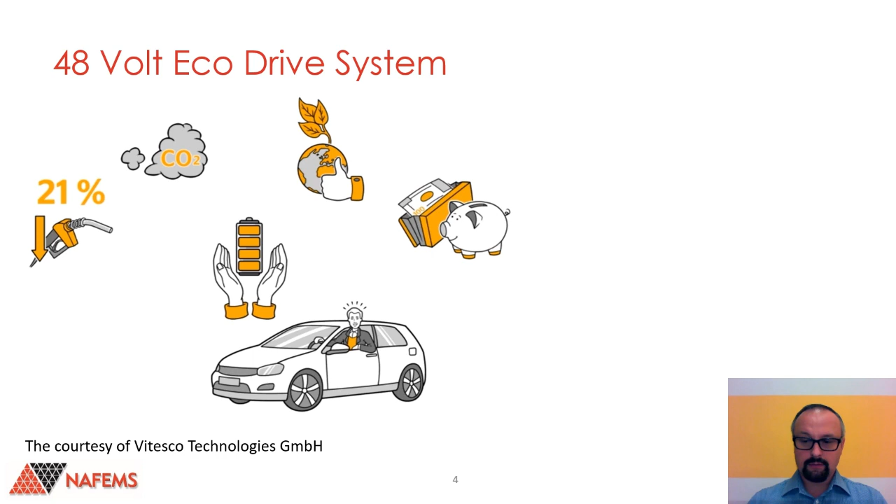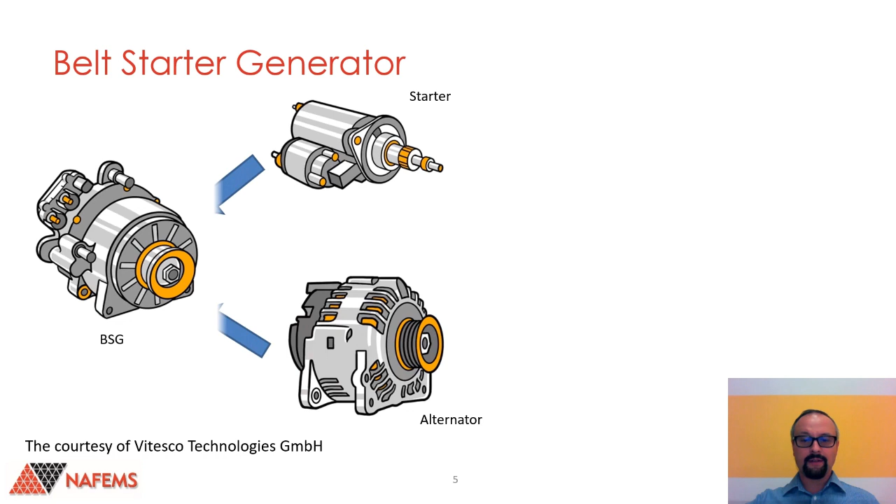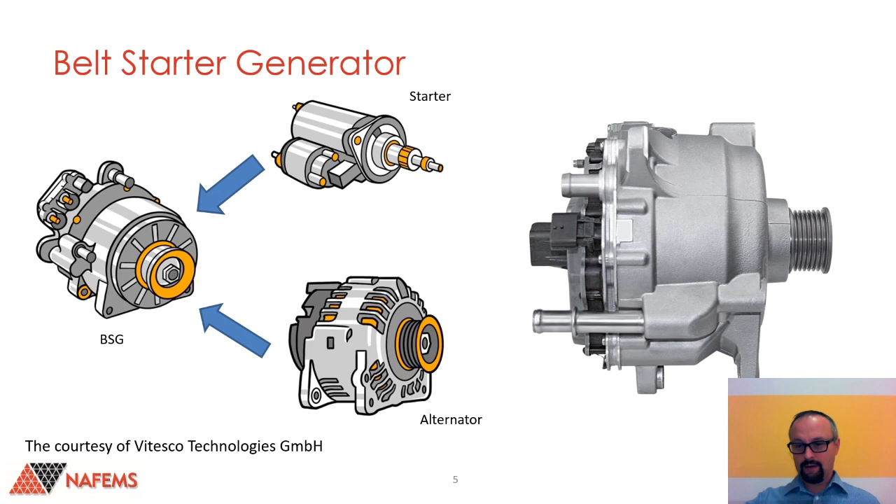And the system was designed by Vitesco Technologies, formerly known as Continental, and it was already used in cars like this Audi A8. The heart of this eco-drive system is the so-called belt starter generator. It is a device which replaces two other devices formerly used in traditional combustion cars, namely the starter and the alternator. And if you look under the hood of this Audi A8, you'll probably see such a device. So an assembly of parts made almost only from metal, from aluminum in this case. You will see the belt starter generator mounted close to the engine, on the main transmission belt of the engine. And because of that, the whole assembly is mainly loaded by the forces generated by this belt, so by an oscillating force.

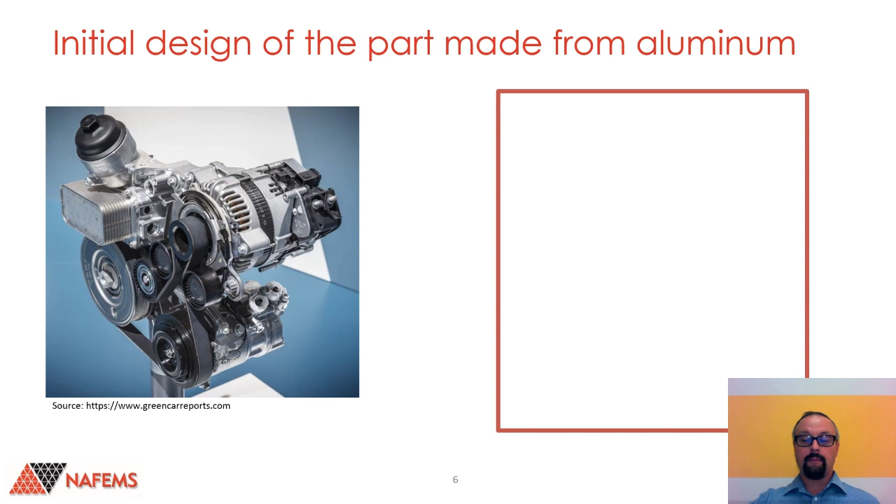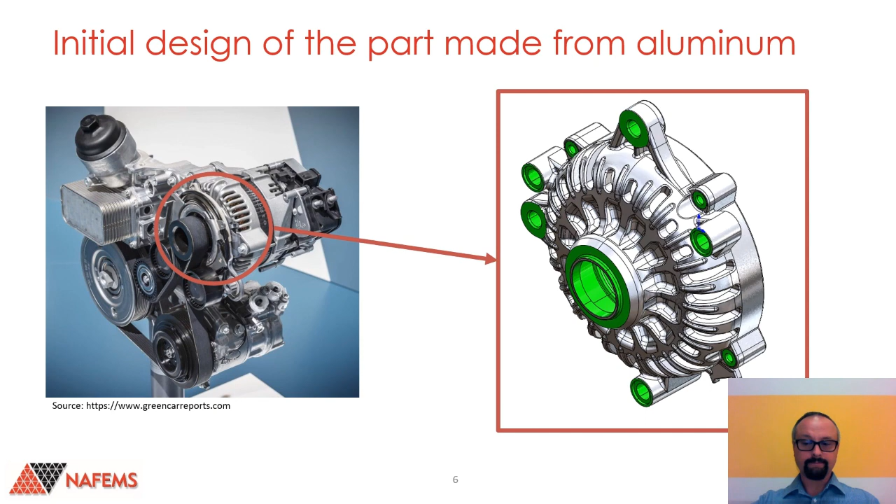And as you can see, almost all the main parts of the assembly are made from metal, from aluminum. But our job today is, of course, to replace the metal parts with plastic ones. And during this presentation, I'm going to describe this metal to plastic replacement process for this particular part, the front half of the housing here. Okay, so let's do it. Let's take the metallic material from the part, and instead use the polymeric one.

But I think almost everybody knows that things aren't so easy here, and it is impossible just to take the old design, the old geometry, and use the new material, especially a polymeric material, and just produce new parts. Because, as you can see here, the wall thicknesses in this particular part vary from 3.5 millimeters to almost 12 millimeters, which is, mildly speaking, unsuitable for injection molding, and it will lead to huge warpage and make the part not acceptable by anybody.

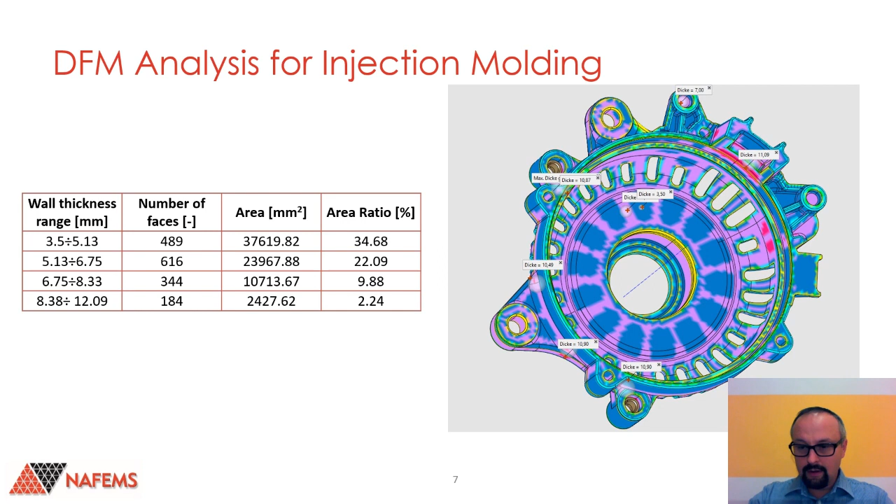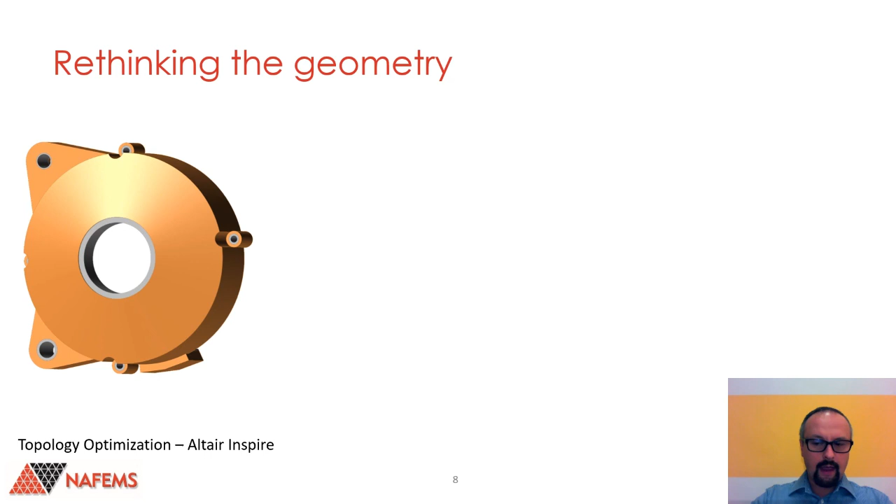So if we cannot use the old geometry, the old design, we need to make a new one. And to do so, we start with a shell model with a constant wall thickness suitable for injection molding, and we perform a so-called topology optimization to look for the new geometry for the structure, like these ribs here, which were suggested by the optimization, and they are obviously needed to fulfill the structural demands for the part.

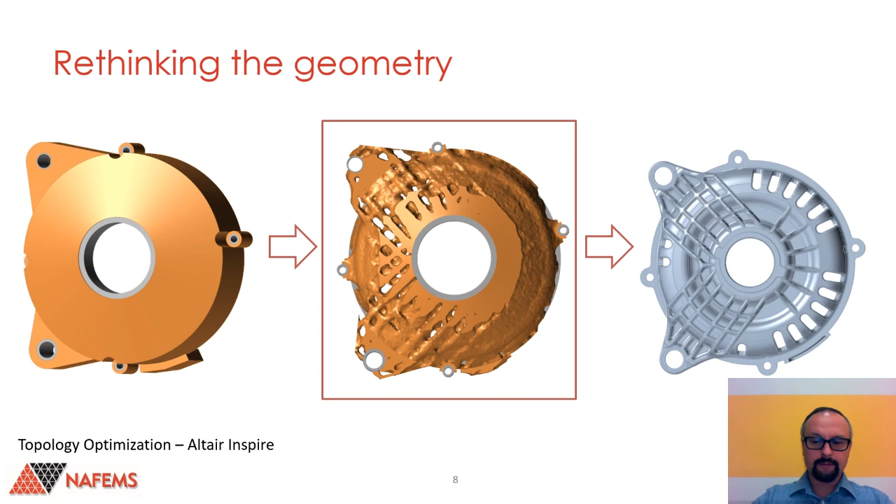Even though we design our geometry according to these DFM rules, so with a constant wall thickness, we still need to double check it with this injection molding simulation, because as you can see here, it appears that our well-designed geometry has a post-molding deformation warpage of almost 2.6 millimeters in this specific area here.

And of course, with software, with Moldex3D in this case, we can not only predict the displacement, the value of the warpage, but we can also try to avoid it by changing our geometry. And as you can see here, that's exactly what we did. By changing the geometry of the ribs in some areas near to the walls, we reduced the warpage by almost 50%, from 2.6 millimeters to 1.5, and kept it in the acceptable range.

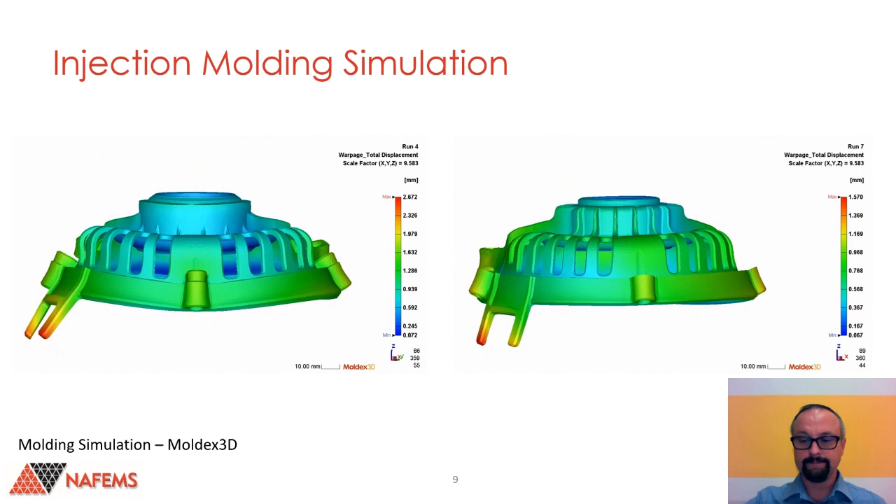And now, if we have our geometry, which is fully prepared for the manufacturing process, for the injection molding, we can move to the structural analysis, to the frequency response and numerical simulation of our part, because the main force, the main load for our design is the force generated by the transmission belt of the combustion engine.

And as you can see here on these pictures, the values of stress and strain aren't very worrying. They aren't above the limits which were set up by the producer of the material, because here we are using PA66 with 30% fiber reinforcement, and such values are still okay, still acceptable. So, are we done here? Are we ready to produce the part? Of course not. And why not?

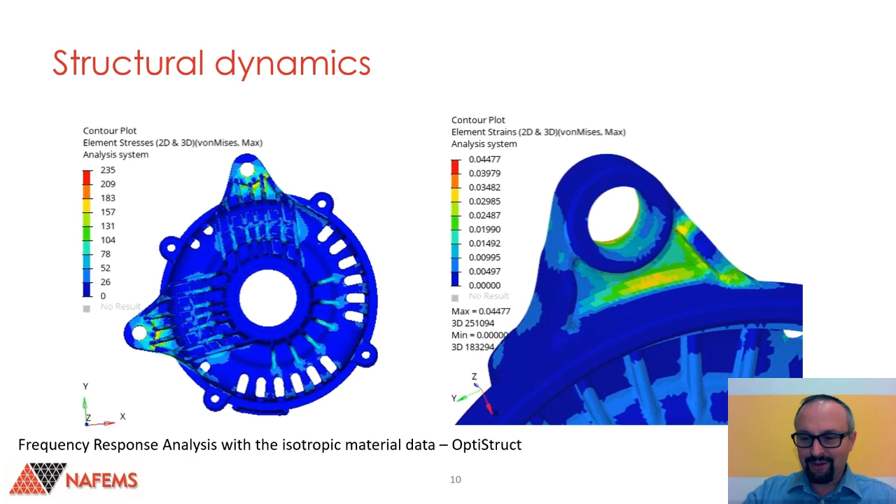The key to the answer is this one word here, namely isotropic. We cannot assume that our polymeric material or composite after injection molding is going to have fully isotropic properties. Such an assumption at this stage, to put it mildly, isn't a good idea. We always need to take into account the orientation of the fibers in our part after the injection molding process. But which orientation is the right one, and which one should we really consider during our structural analysis?

To answer the question, it is always good to use some kind of optimization tool like DOE, which is embedded in Moldex3D software, in which we can specify our parameters. In this case, they are different models with different gate types for our geometry, different filling times, and mold temperatures. In my opinion, these three are the parameters which have the largest impact on the fiber orientation in the molding. And of course, we need to also define a quality factor.

In this case, we need to use some kind of substitute for our fiber orientation, because right now it's impossible to directly define fiber orientation as a quality factor for the DOE analysis. So we used shear rate in this case, which in my opinion is directly coupled with the fiber orientation, and it can be used in such a manner.

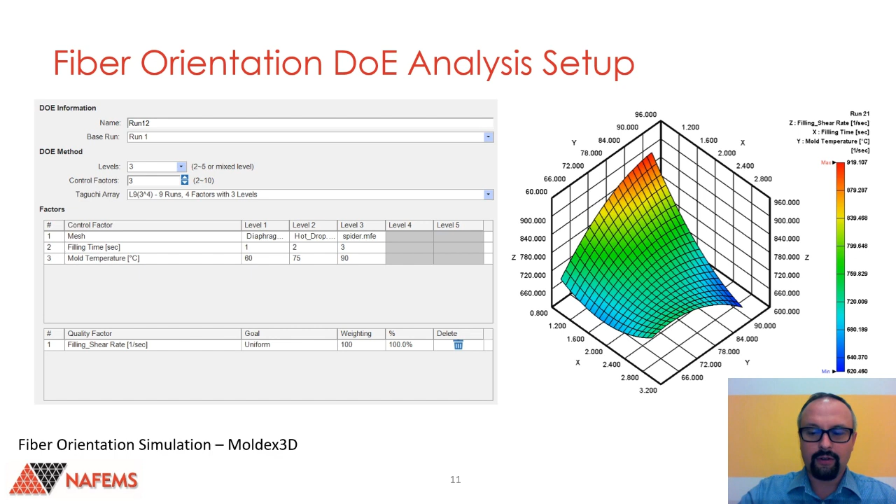But of course, we do not need to analyze it manually or by ourselves only. The program gives us the whole results and finds for us the optimal setting, which in this case looks like that, the model of the gate. So we need to use this type of gate, a so-called spider gate, to have the best possible fiber orientation, and the values of filling time and mold temperature are as given here.

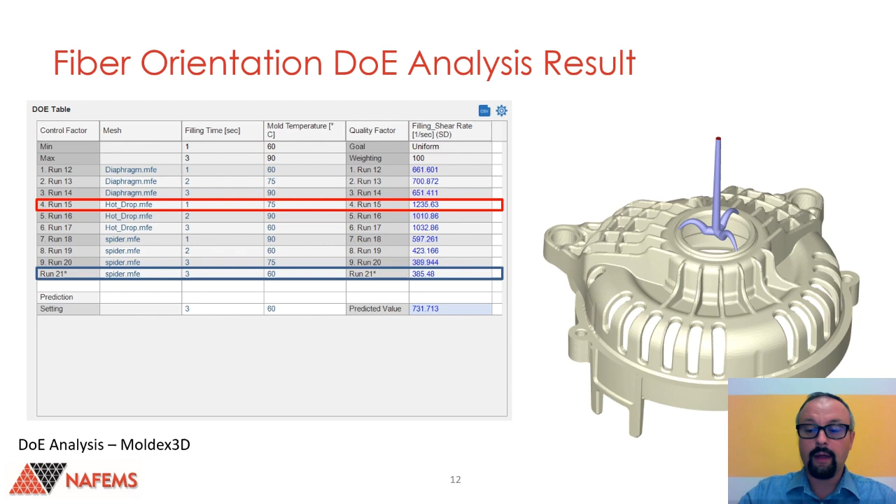And to double check the results of this DOE optimization, it's also good to compare this best result, this optimum, with the worst case, which for this specific case is this one here. So with a filling time of 1 second, mold temperature of 75 degrees, and a direct hot runner gate, hot drop on the part. And as we can see here, there is a clear difference between the optimal and the worst setting. We can see it here in this area.

These two are the results of the E-modulus after the molding, the values of the mean modulus in our part. And as we can see, we have a more uniform distribution of the modulus value for our optimal setting. That's the reason it is optimal.

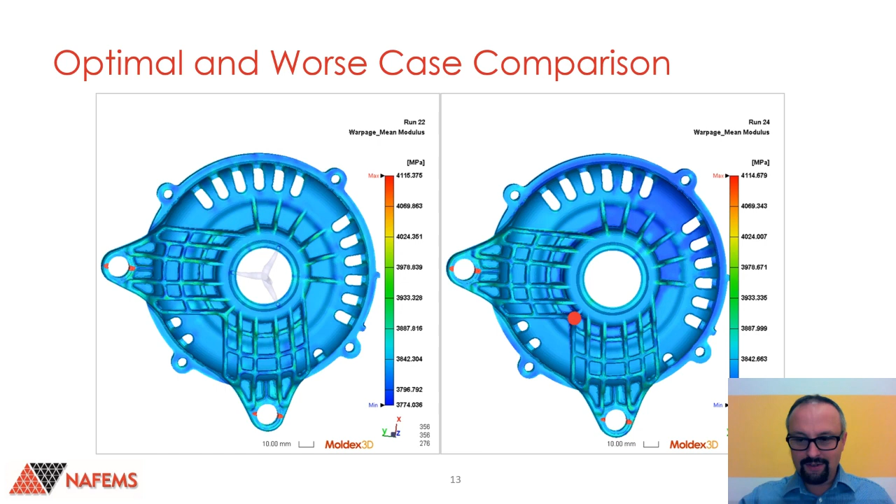So at this point, we know that we need to perform our frequency response analysis, and we have already found the best fiber orientation for our part, for the geometry we have designed. But there is still a gap to be bridged. Namely, we need to transfer the results of our injection molding simulation to the input of our structural analysis.

But right now we don't need to find the way how to do it. There is an already designed, made, and invented solution for that, namely Digimat, the software which helps us to bridge, to combine the two worlds of manufacturing and structural simulations.

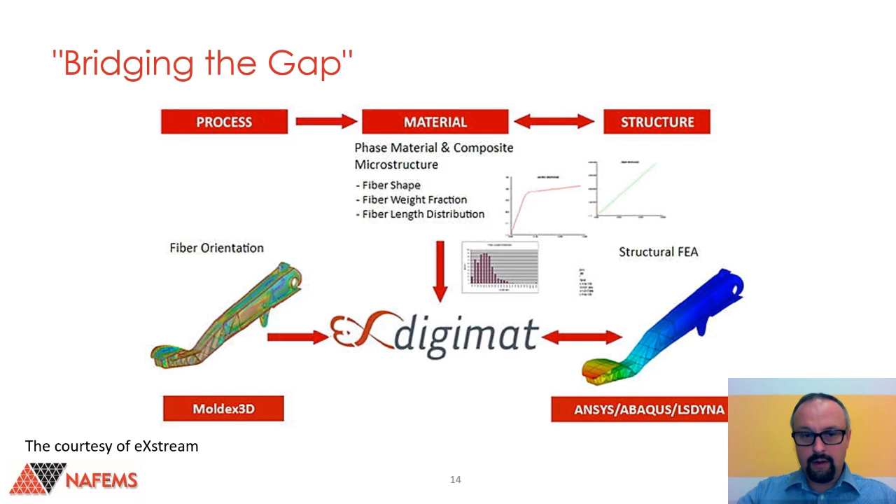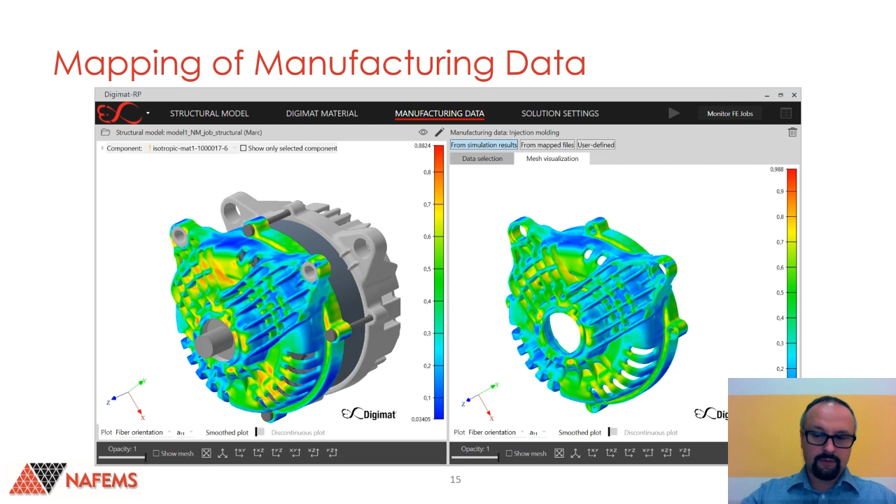So that's the first thing, very important, that the program allows us to map the fiber orientation, weld lines, and other properties from one simulation to the other one. But it also provides us with the material model, which is able to use these properties in the structural analysis, which is probably even more important than only the properties which are being transferred from injection molding to structural simulation.

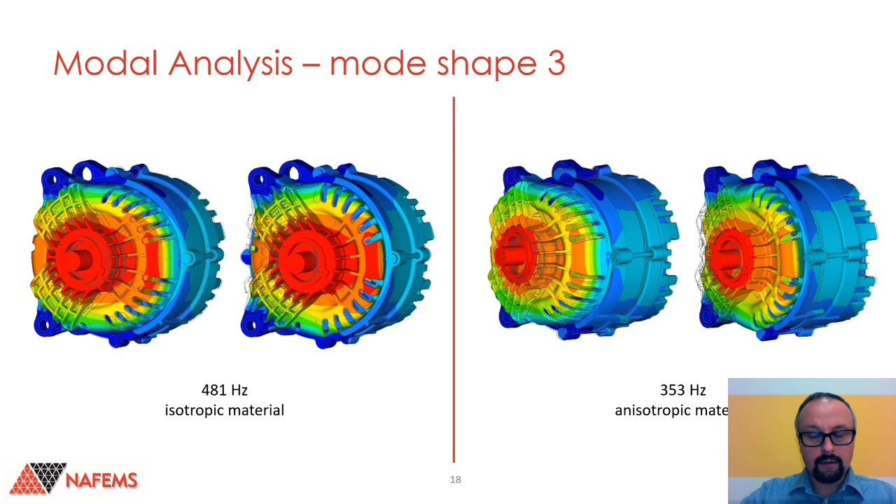So the displacement, the direction of the displacement is the same, and the amplitude. So the situation is pretty much similar for the second mode, for the third mode, and as we can already predict also for the fourth mode. But the natural frequencies of all these modes are not the same.

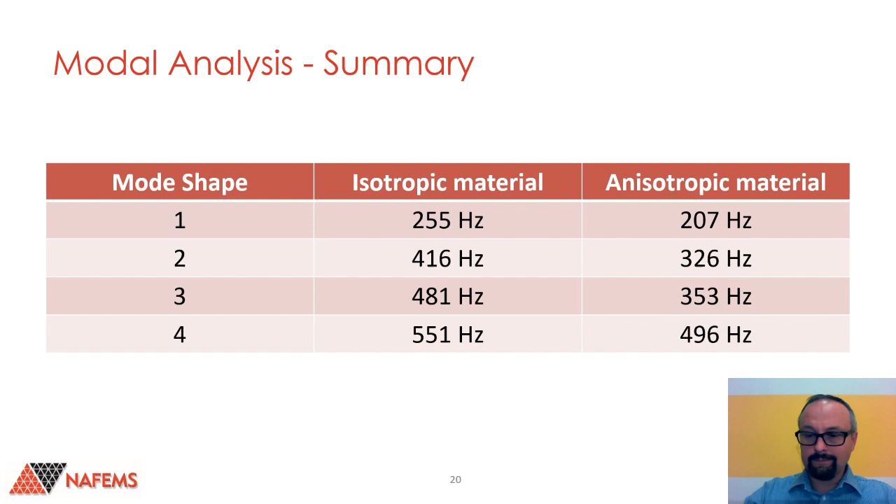I would really like to show you the one-to-one comparison between the experimental result and the result of the structural analysis. But the experiment hasn't been done yet, so at some point we just need to believe that our results, our simulations are correct. And looking at these cases here, we can assume that they really are.

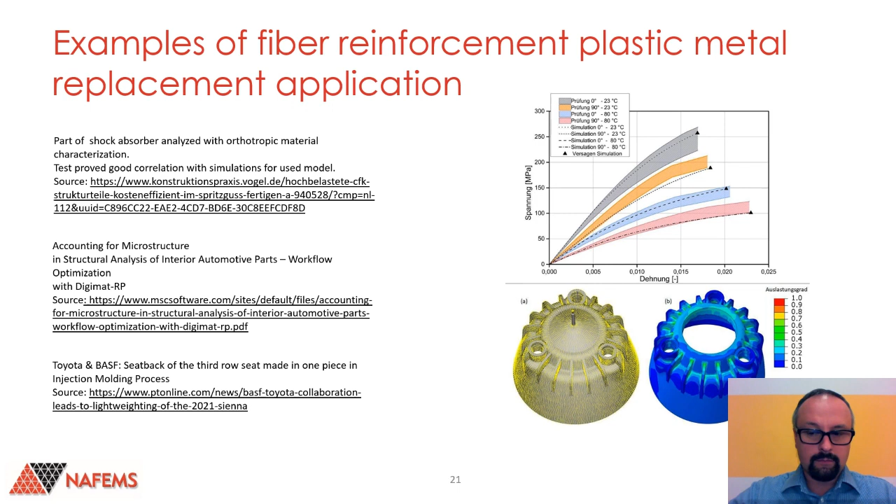So, to sum up, don't be scared to use plastic materials, even though they are right now treated almost like toxic waste, and people are trying to remove it from any applications. You can always make something better from the polymeric materials, something more environmentally friendly, lighter, and something which is going to be produced in a less energy consuming process.

But please do not redesign the old geometry. Please do not redesign the geometry of the part which was formerly made from metal. You always need to start from the beginning. You always need to start from the topology optimization. After that, make a first round of structural analysis, even an isotropic one, just to check if you are still in the range of your tolerance of the stress and/or strain.

After that, make a loop of injection molding simulation or any other manufacturing simulation to check if your geometry still adheres to the design for manufacturability rules, and just optimize it in case of large warpage and pressures and so on. And mind the gap between the results of your injection molding simulation and the results you would like to have from your structural analysis.

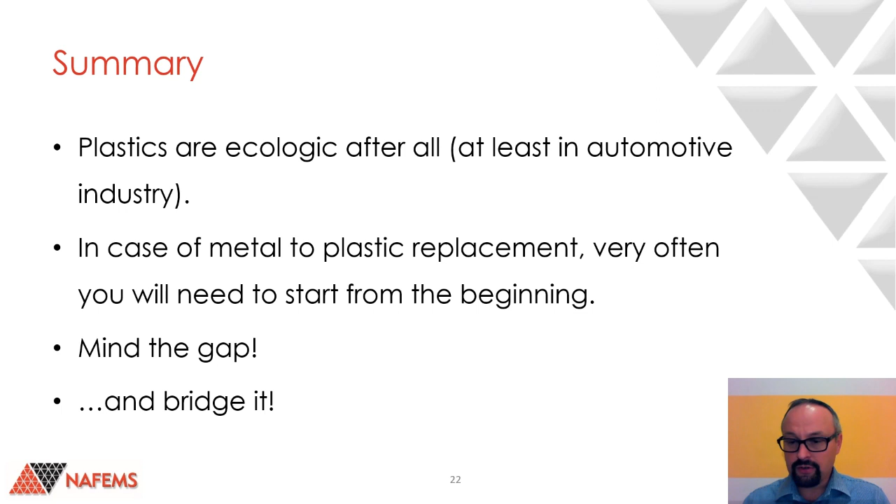Like I said at the beginning, I didn't show any specific meshing techniques or solver settings and so on. But you can always ask me about it.